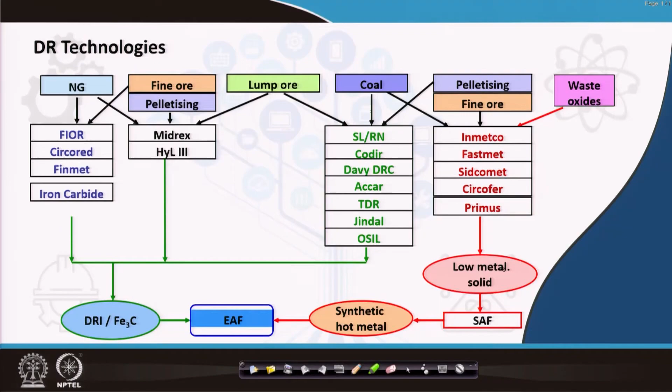Okay, we are discussing the introduction on alternative routes of iron making for direct reduction and smelting reduction process, continuing from the last lecture. This is lecture number 52, previous one was 51.

So we have talked about the basic definition of the DR processes and its reactions involved, and now I am talking about some of the DR technologies that are available.

Direct reduction technologies. On the left hand side, these are all fluidized bed based technologies. First is called the FIOR process, fluidized iron ore reduction. It is a US technology.

Finmet is also a similar technology. It was developed by Voestalpine of Austria as well as a Venezuela company. This is also fluidized bed based technology, both FIOR as well as Finmet.

The only difference is, let me first tell you about the FIOR process. In the FIOR process you have fluidized bed reactors in series, around 4 or 5 reactors, and in the first reactor some preheating is done by burning natural gas. Then 3 reactors in series reduce it, with reduction gas entering through the last reactor and cascading through the others.

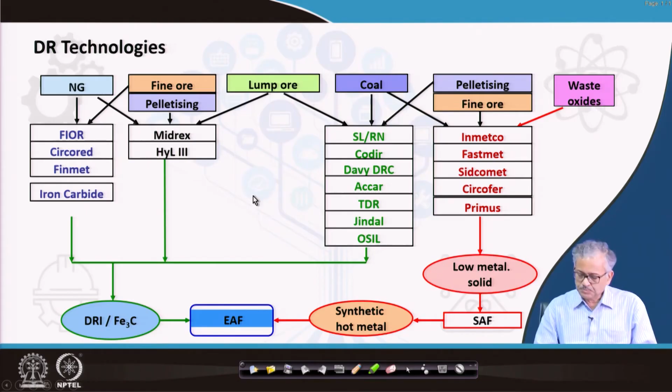Iron carbide is another process, where you reduce the iron ore in presence of hydrogen and CO gas, reformed from natural gas, and then produce iron carbide directly. This iron carbide dissolves into the liquid iron, which is the advantage - you do not have to melt it, it basically dissolves. So these are the different DR technologies that are available.

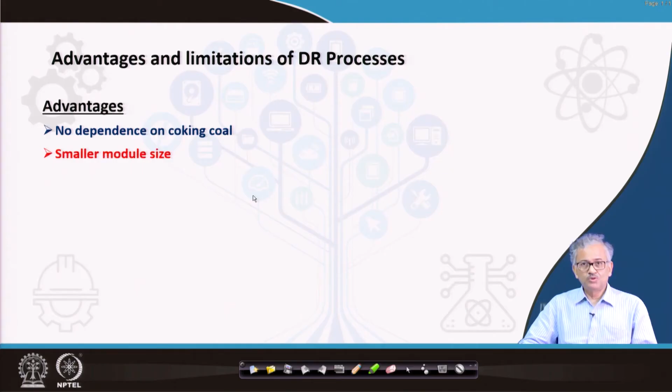Now, advantages and limitations of the DR process. First of all, advantage: no dependence on coking coal, that is the major advantage. Smaller module size - the MSME sector can use it very nicely at low cost, giving lower capital investment. And if the size is less, your space requirement is also less, so you can use it economically in a very small space.

Easier process control and process maneuverability - since the reactor is very small, maneuverability and control are easier. Limitation: the final product is solid and has to be melted, so there is some energy involved here.

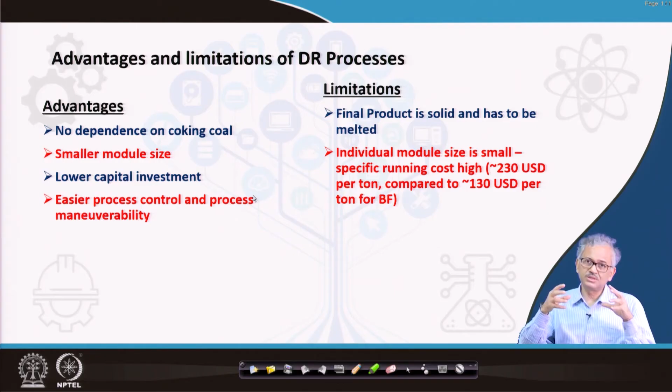Individual module size is not very large, that's why specific running cost is very high. The specific running cost is high because you are not producing large quantity, you are producing less because of size limitations. As a result, specific running cost becomes high. For example, $230 per ton compared to $130 per ton of BF hot metal.

So in the DR process, the specific running cost is high, especially if you consider the rotary kiln process. For example, 500 tons per day is the capacity, so if you want to produce more, you have to use multiple units. When you go for multiple units, obviously your specific running cost will be high.

From the same reactor, if you can produce a large amount of product, your specific energy consumption will be less. But if you want to produce a similar amount of product from a number of units, obviously you will have more energy consumption, because for each unit, maintaining each unit requires some external energy.

Low carbon content in the final product causes difficulty during steel making. In most coal-based DR processes, the carbon content is quite low, around 0.1%. So its liquidus is very high, and if you want to melt it, you require more energy.

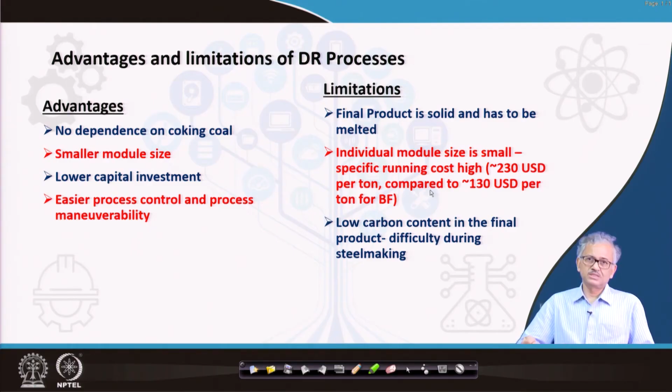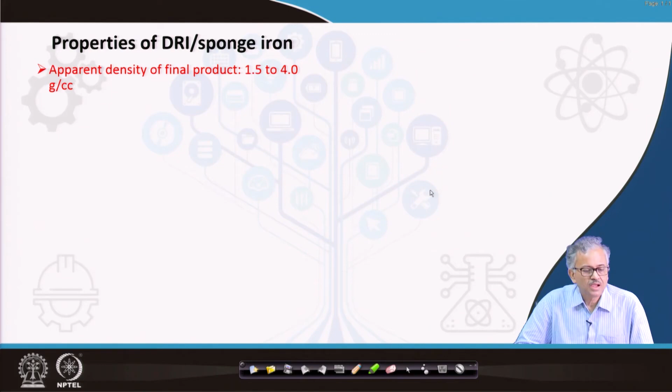Properties of DRI and sponge iron: first you must know some of the properties of sponge iron. The apparent density of the final product is around 1.5 to 4 gram per cc. You know the iron density is around 7 to 8 gram per cc. Compared to this, the apparent density of sponge iron is so less, 1.5 to 4.

Why? Basically sponge iron contains some gangue obviously, and gangue contains a lot of oxygen. Also, depending on the metallization, wustite will be there in the system. Suppose you have 80% metallization, so 20% iron will remain in the form of wustite, connected with oxygen. That oxygen also reduces the weight.

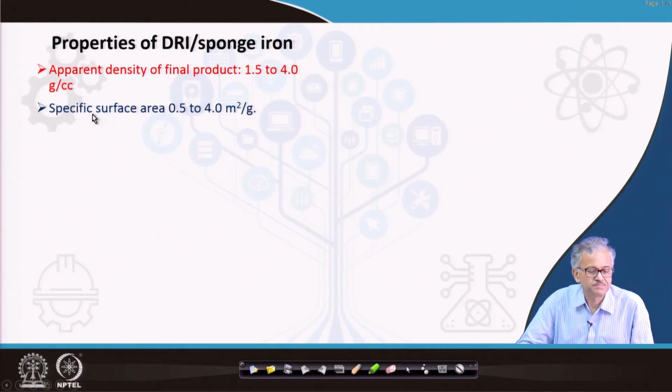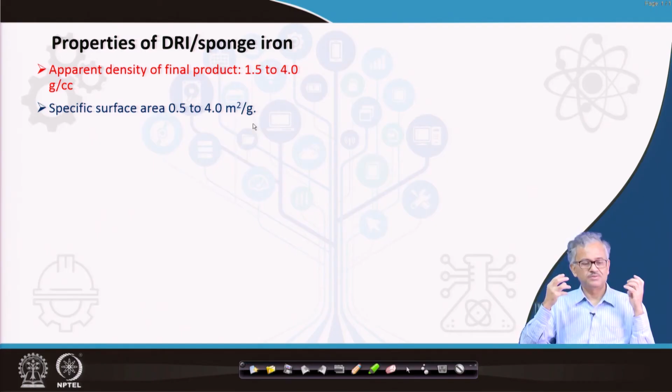Besides, sponge iron contains a lot of micropores, a lot of pores inside it, so a lot of air is there inside. As a result, your apparent density is less, and depending on your metallization and the quality of starting raw material, the density of the final product can be 1.5 to 4 gram per cc. The specific surface area is quite high, 0.5 to 4 meter square per gram, because of the presence of pores inside it.

Carbon content varies from 0.1 to 0.15 for coal-based DRI, and up to 2.5 for gas-based DRI, as I said. This is 2.5, very high, because you can control it. Nowadays, even higher carbon in the DRI can be imparted into the advanced gas-based DR processes.

Another thing: this high porosity and large specific surface area increases the reactivity of sponge iron, but at the same time, because of this, the sponge iron is also very prone to reoxidation. High porosity and large specific surface area of sponge iron make it very likely to reoxidize.

That is not good, because after being metallized, if it gets reoxidized, your yield will be less. So how does it get reoxidized? If it is heated even to only 200 degrees centigrade, sponge iron will be reoxidized, that is why you cannot preheat it. Even at room temperature in presence of moisture, hydrogen generation basically increases the temperature.

Therefore, whatever it may be, this is the sponge iron, especially the gas-based sponge iron, which I will talk about, because coal-based sponge iron is protected by a slag layer to some extent. This slag layer basically covers the pores at the surface, so it is not that reactive and is less prone to reoxidation. But the gas-based DRI is very much prone to reoxidation.

Some kind of passivation, some passive layer has to be generated on the DRI if we want to use it in the form of cold DRI and transport it somewhere. So you have to passivate the gas based DRI. Some passivation techniques are in place, I will talk about that.

But the fact remains that DRI is very prone to reoxidation, so you have to be cautious. DRI cannot be preheated before melting. You have no scope of preheating, because if you want to preheat it, it will reoxidize.

Sponge iron should have low gangue. Gangue should not be very high. Metallization should be high, around 90% and above. Otherwise, a lot of iron will remain in the form of FeO, which increases the load on the electrical furnace.

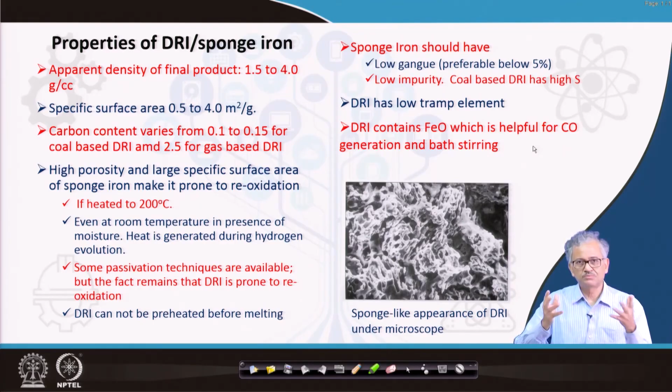DRI contains FeO, which is helpful for CO generation and bath stirring, because even at 90% metallization some amount of FeO is there. But FeO should not be very high, some amount is there, and that is good.

Now, some differences of coal versus gas based DR technology. Gas based DR involves gas-solid reaction, even faster at low temperature, because gas-solid reaction is much faster compared to solid-solid reaction. Coal based also involves gas-solid reaction, but here it is basically a counter current process.

The gas is moving from the bottom and the solid is coming down, so the interaction in gas-solid is much more in the gas based process. That is why it is faster even at low temperature, and the gas based process can also be carried out at very high kinetics at comparatively lower temperature.

Reforming of natural gas produces both carbon monoxide and hydrogen. This hydrogen is a much better reductant compared to carbon monoxide, both thermodynamically and kinetically. That is why the DRI of the gas based process has higher metallization.

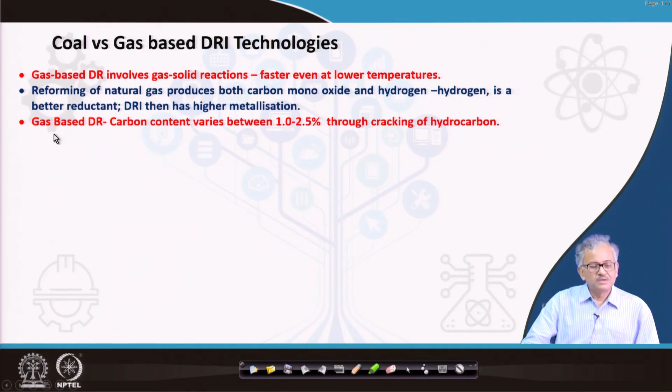In the gas based process, the carbon content of the DRI can vary from 1 to 2.5% through the cracking of hydrocarbons, some special technology is there. During the cooling process of DRI, hydrocarbon cracking takes place, which deposits carbon on the DRI. So gas based DR has higher carbon content, so its liquidus will be less. Coal based DR, irrespective of operating condition, has carbon content always between 0.15 to 0.2.

Obviously, high carbon DRI gives an advantage in steel making - lower melting point, higher opening carbon in the bath. As I said, gas based DRI are very prone to self ignition and reoxidation. The coal based DRI is protected by a slaggy layer outside.

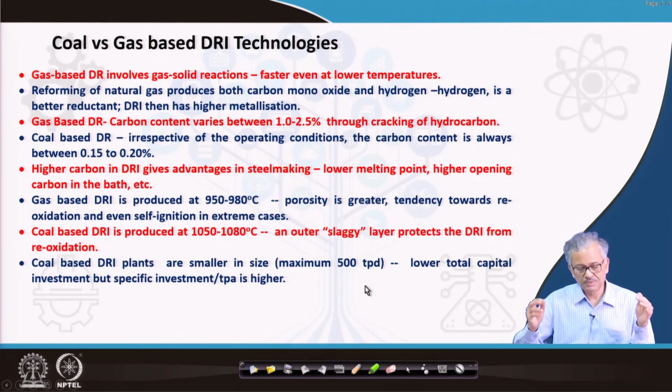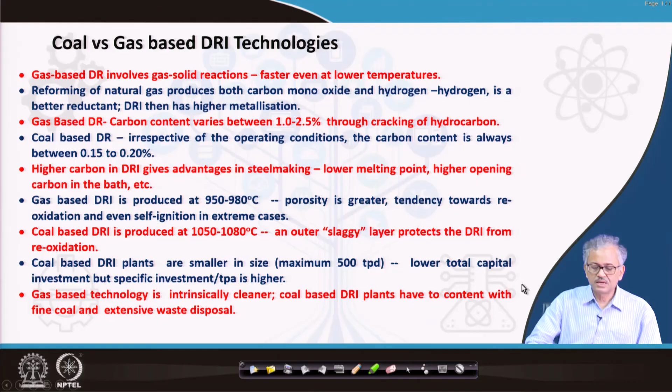Coal based DRI plants are smaller in size, maximum 500 tons per day, rotary kiln, maximum capacity 500 tons per day. So lower capital investment, but specific investment is high, as I have discussed already. Gas based technology is intrinsically cleaner. Coal based DR plants have to contend with the fine coal and extensive waste disposal.

This is the typical analysis of the gas based and coal based process. You can see the metallic iron is higher in the gas based process, total iron is also high, so metallic iron is high. The carbon is 1 to 2 compared to 0.1 to 0.3 in case of the coal based process.

Sulfur you can see is 0.03 to 0.05. In the coal based process it is a little higher, because the DRI is in direct contact with the coal. In the gas based process the sulfur is much less, 0.008 to 0.01, because in coal based process the DRI is in direct contact with the coal, which is a source of sulfur. The phosphorus is more or less similar.

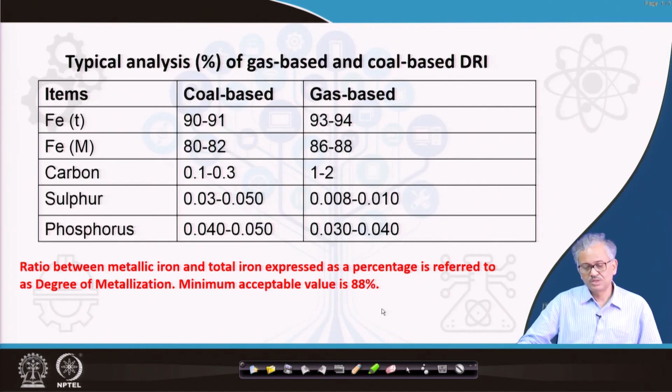The ratio between the metallic iron and the total iron is called metallization, and minimum acceptable is 88%. Metallization minimum should be 88%, otherwise a large amount of iron will be connected with oxygen in the form of wustite, which increases both the thermal and reduction load of the electric arc furnace, and sometimes it may not be economically viable.

Use of sponge iron: you can use it in the electric arc furnace as a substitute for scrap. You can use it in the basic oxygen furnace as coolant, in the induction furnace as feedstock, and DRI less than 3 millimeter, very fine DRI, you can use in the induction furnace. In the blast furnace, use it as metallized iron to reduce the carbon load and CO2 emission.

Sometimes the DRI, if it is not of very high quality and metallization is not very high, because you have used a lot of waste material, resulting in low final metallization, that DRI you can directly put into the blast furnace, because since it is metallized iron, it will reduce the coke rate and reduce the overall CO2 emission.

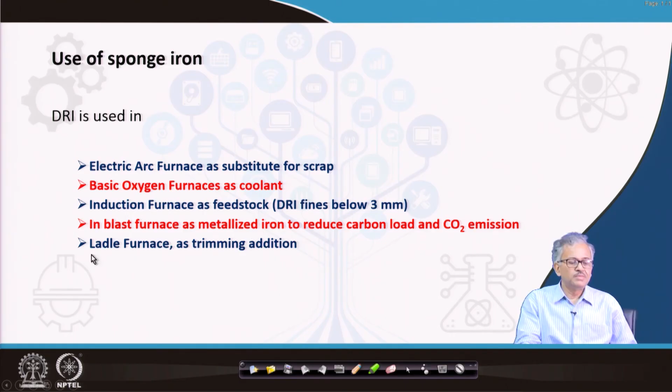You can use it in the ladle furnace as a trimming addition, because you are alloying it, so you have to dilute it - you can use sponge iron there.

Now, evolution of the share of the EF in global steel production. Why am I directly coming to the electric arc furnace? Because when I am producing the DRI, since it is solid, you have to melt it into the electric arc furnace.

Percentage share of the electric furnace is increasing steadily. Why? Because any solid charge - the tendency now in the world is to operate with more solid charge. Scrap and DRI are increasing day by day. Although in India we do not have much scrap since our per capita consumption is quite low, outside world per capita consumption of steel is very high, so end of life scrap generation is also very high. So scrap generation is high, and also you have DRI production, so solid metallics is increasing.

If you increase the solid metallics, you need an electric arc furnace, because the basic oxygen furnace has a limitation of taking solid charge as coolant - more than 25% it cannot take. But EF can take it in any proportion - hot metal, scrap, DRI in any proportion, because it has this external source of heating. So if the solid charge goes beyond 50%, it is not a problem.

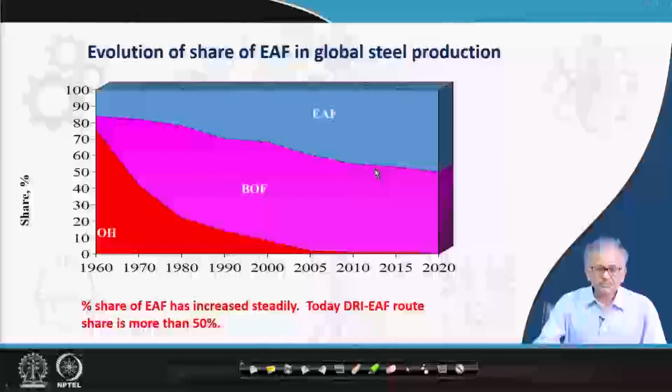Since solid metallics are slowly increasing, both scrap as well as DRI, electric arc furnace is also running very high, and now today around 50% of steel is produced by electric arc furnace - DRI scrap route, DRI and hot metal scrap route.

If you see the share of different metallics as a percentage of the total, you can see hot metal is decreasing from 58 to 52% of the charge. And the DRI and hot briquetted iron has increased from 3.4 to 8.1% up to 2010.

I have the data showing, but today it is further more. And recirculating scrap, that means generated inside the plant, is decreasing day by day because of process advancement, the scrap generation within the plant is decreasing. So 12 to 8 it has become, but collected scrap, that is end of life scrap, is increasing, that is increasing from 24 to 31.

The more the per capita consumption of steel, the more this end of life scrap is expected, so it has increased from 24 to 31%. Unfortunately in India, since our per capita consumption is less, we are not generating too much scrap. But scrap is the future production of steel, because by scrap melting you can minimize the energy, minimize the CO2, and everything. So we have to go for that.

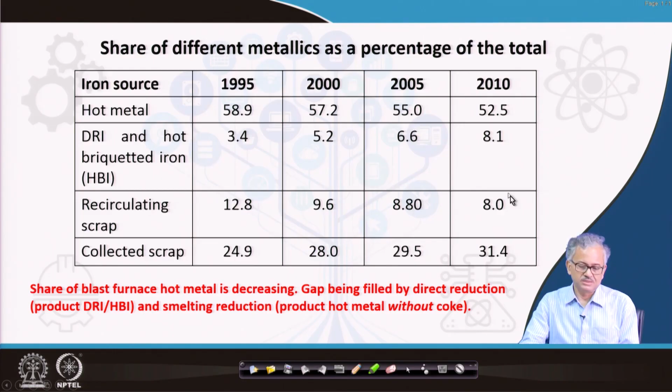So you can see solid metallics is increasing, and the liquid hot metal charge in the BOF is decreasing. In the steel making furnace, the proportion of hot metal is decreasing from 58 to 52, and in every case you can see the scrap and the DRI are increasing.

So I have already given an introduction to the SR process, because while I discuss the SR process in detail, I will talk about that, but I will not go much into the introduction. The SR process I have already talked about.

In the SR process, initially the main idea was to melt everything in a reactor, such that we can get rid of all the irregularities that take place in the blast furnace. So in a single reactor you melt everything, in the liquid state you reduce and produce the hot metal.

But later on, a two-stage process also came, with totally separated processes. One is the reduction unit, another is the melting and gasifying unit. That is called the melter gasifier, and the reduction unit, in this two-stage process, and these are totally independently operated, and the off gas from the melter gasifier is used in the direct reduction process.

And then that gas comes out, and that gas is also of very high credit because it is very CO rich with a lot of sensible heat as well as chemical heat. So it has to be used for downstream application as well as for power generation.

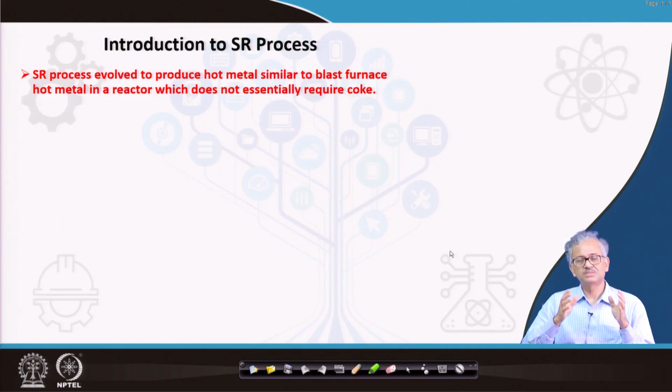Otherwise this process will not be very effective, because in the smelting reduction process, the only problem is that in the reactor you can use any non-coking coal. I am just coming to that. I'll talk about all these things, smelting reduction, so I am not going into this now, lecture time is limited.

So in brief, I would like to say that this process is very good, because you can use any low grade material, you can use non-coking coal, you can use inferior grade of iron ore, you can use waste material, you can melt it in a single reactor or in 2 reactors, a reduction reactor and the melter gasifier, and then you can produce the hot metal.

This is a very nice process, but the major problem in this process lies in the fact that since you are burning the coal in presence of oxygen, there is intense heat generated, and a lot of CO is generated, and the thermal and chemical efficiency is not as good as the blast furnace.

As a result, whatever off gas is coming is rich in CO, and the sensible heat is also there. So unless you utilize it in the process, you can see this is a very fast process also, but you cannot utilize this total carbon, and the carbon rate or coal rate is very high in this type of process because of the reactor design and all these things.

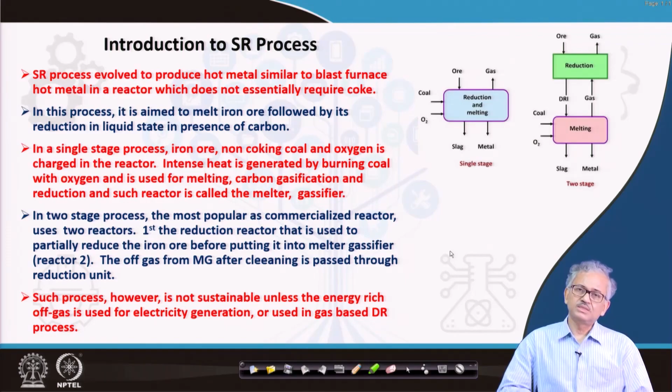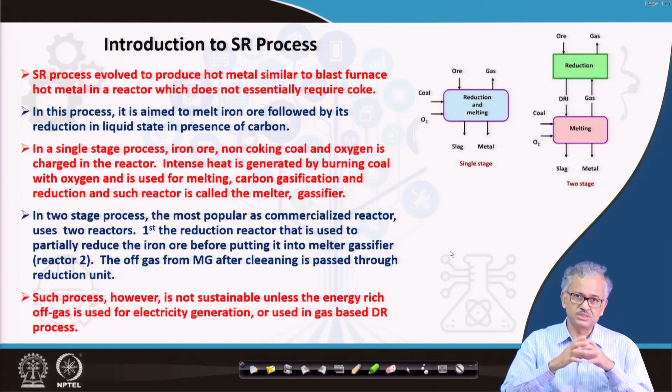The carbon rate or coal rate is much higher compared to the blast furnace, around 2 times, more than 2 times, around 4 times in some reactors. So as a result, the off gas that is coming will be very rich in CO, unless it's utilized for power generation or used for DRI production, this process is not at all economic. I will discuss this further in the next lecture.